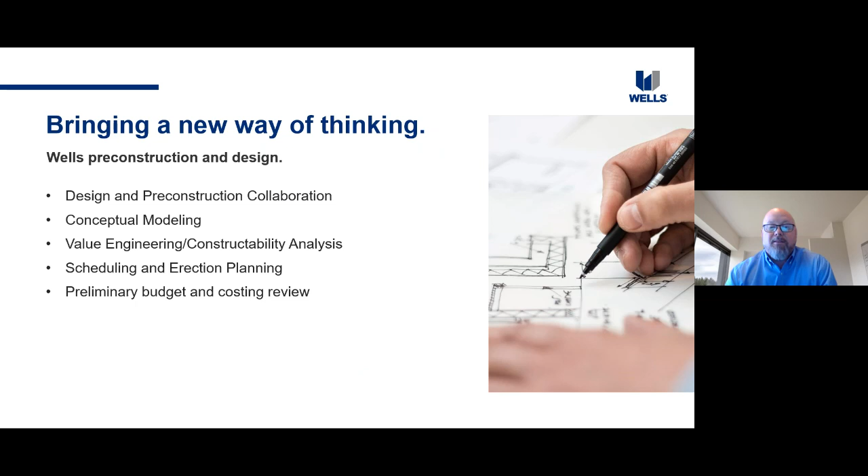Precast concrete is no longer just a standard gray warehouse panel. Combination finishes and new techniques in finishing have become the norm. By using custom forms, form liners, mixes, different finishes, and staining, we're now able to create or emulate almost any building material on the market. To see a full line of Wells' unique finish options, feel free to dig into our architectural inspiration guide on our website.

Something that many of our partners do not know is that Wells has over 60 employees dedicated to the sealants and restoration division. This team covers our entire geographic region. They support not only new construction, but also do extensive maintenance and restoration work in the precast and other parts of the building systems as well.

Now we're going to get to the focus of today's presentation. We are going to attempt to answer the question of how precast as a building solution, with its inherent characteristics, lends itself so well to projects in the civic and community market sector.

As you are aware, the civic and community market sector is far-reaching. We touch everything from community centers to water treatment facilities, and many of these projects serve more than one end user type, sometimes within the same facility. As such, many of these projects require very specific needs assessments completed prior to developing programming for the proposed space.

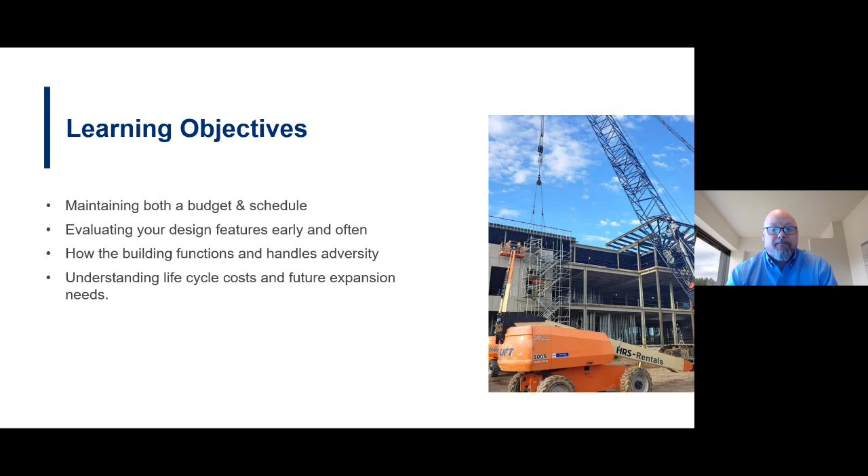By the end of this presentation, we hope you have a better understanding of how using precast and early collaboration can help you be more successful for your owner over the lifespan of the building. Now Chase is going to kick us off today as he shares some of the aspects of project cost and schedule impacts.

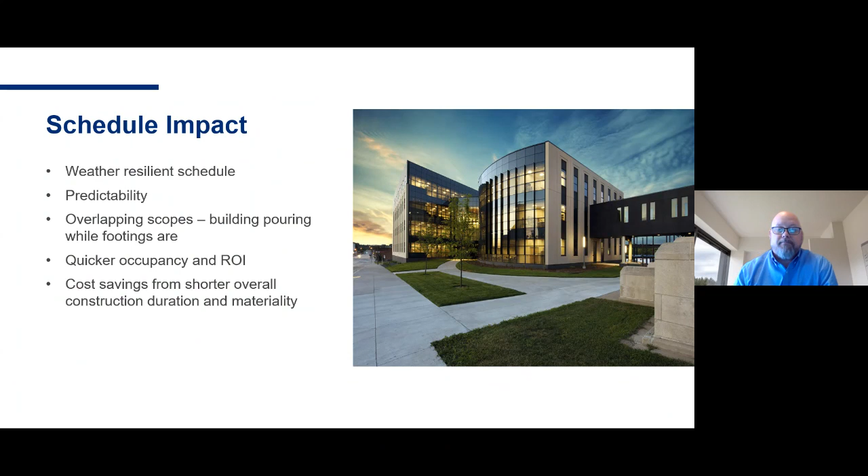Thanks, Kurt. So as Kurt said, pretty much all these projects are budget driven, budget conscious. You're using taxpayer dollars and trying to get the best bang for your buck. So where can precast still play a role in that? A big one that often gets overlooked cost-wise that can contribute to that is the schedule.

Obviously precast is going to be very schedule advantageous from how it's a prefabricated system with a weather resilient schedule. Other building materials getting installed on site, especially in a lot of the markets we work in with winter, as long as it is, can cause delays. Precast is being made off-site in the plant, stored in our storage yards, while the footings and earthwork are going on site, so that once the site is ready, it's being shipped and we're just placing everything, welding it all together. So weather does not hinder us a whole lot in the install of the building itself. That lends to a lot of predictability for scheduling and those end dates.

Often the buildings, if you're thinking community centers or schools or anything like that, are going to have a hard open date that needs to be hit for those end users to get into and occupy the space. The other one is quicker ROI, return on investment. Again, with those bonds and taxpayer dollars, the sooner they can be put to work for those taxpayers, you're going to have a happier community and happier stakeholders.

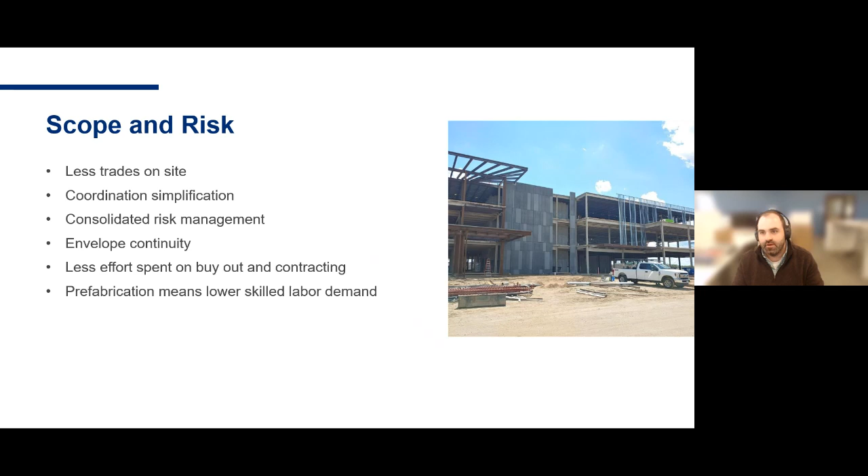And then a big one we're seeing drive a lot of our markets, depending on the exact materiality selected for the design of the building, is that prefabrication in general means less skilled labor demand. Especially, as we'll see in some of the project examples later, if we're trying to emulate a brick or stone cornice work, we can be much more competitive on the precast side versus traditional hand laid masonry, just because that skill is in short supply and high demand. So that cost seems to be creeping up.

Another one that's often overlooked on the construction side for precast is how insurance assesses the risk of the type of material you're building with. I think we've all seen the issues in wood construction specifically, how vulnerable those buildings are during construction for fires, and how difficult it can be to contain an issue once it starts. But there's also a lot of other layers to this, from some insurance folks, of how they assess the type of construction.

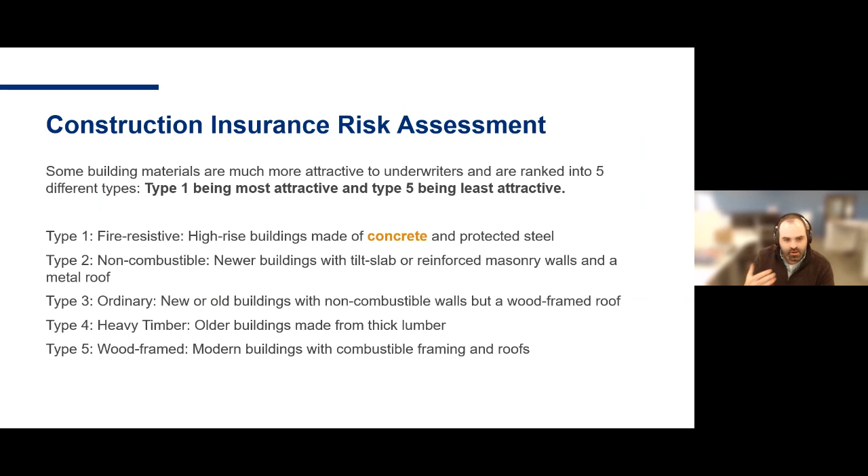You can see here you have type 1 through 5, type 1 being the most attractive and type 5 being the least attractive. Precast, or concrete in general, falls into that type 1, where concrete is naturally fire resistant. It doesn't take any other special treatment applied to it. So even during construction, whereas steel is going up, it's vulnerable for a time until it gets its fireproofing on to get that rating.

So round numbers there, you're just south of 1% of total project cost in the construction insurance right there by the type of building material you use.

Other costs, getting into the hard costs now. Initial construction, obviously we recognize that precast is a premium material, so often if you're going square foot to square foot, it's going to be a premium cost. But like all those items we just mentioned have to be taken into account to really give precast a fair shake of what is it really impacting your project overall.

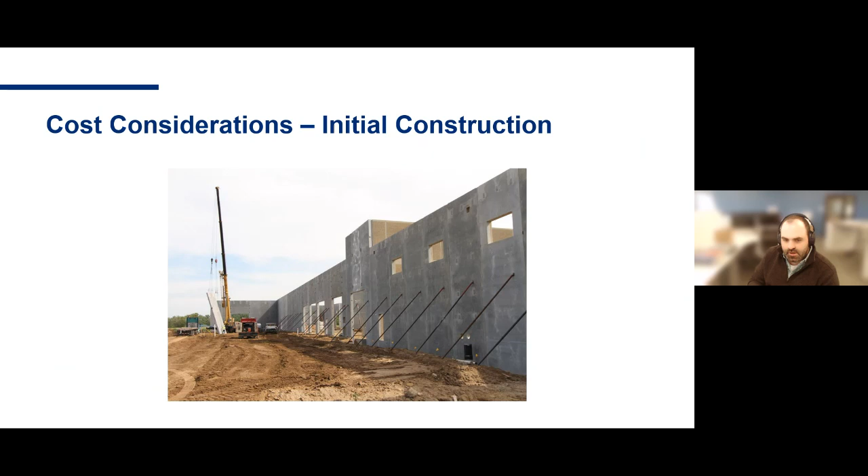The predictability from the schedule, the means and methods of how you have to protect that building overall. That's the beauty about precast is we can come in, set this up like you see in the picture, brace it. That's going to be an engineer bracing plan that's usually going to be covered under the precaster's scope of whoever they're having install it. And you don't have to do any kind of tarping or heating, though you might have some heating to do for the grout underneath of the panels during winter conditions. But all in all, it's a pretty simple, straightforward and speedy construction that can help outweigh that initial cost.

Where precast really makes a difference that isn't often considered in civic and community buildings, at least beyond the initial construction cost, is the maintenance and life cycle of the buildings. Often you're seeing a 50-year life cycle. Precast has been around for 75 plus years at this point. We're seeing a lot of the original buildings still up, still standing, still going strong, with really only minimal annual or semi-annual maintenance or inspections, if not a 10-year maintenance cycle on the caulking or whatever is recommended by the supplier. So the initial construction might be a little bit higher, but the life cycle tails off based on how long you can use the building, and the minimal maintenance you have to put into keeping it a decent, usable building.

Another big one here, especially as we look into sustainability and how we can build resiliently so that we don't have to rebuild buildings as natural disaster events occur, or want to change the use in them, is the resiliency of precast. Something we really pride ourselves on as an industry. It's a very robust material inherently.

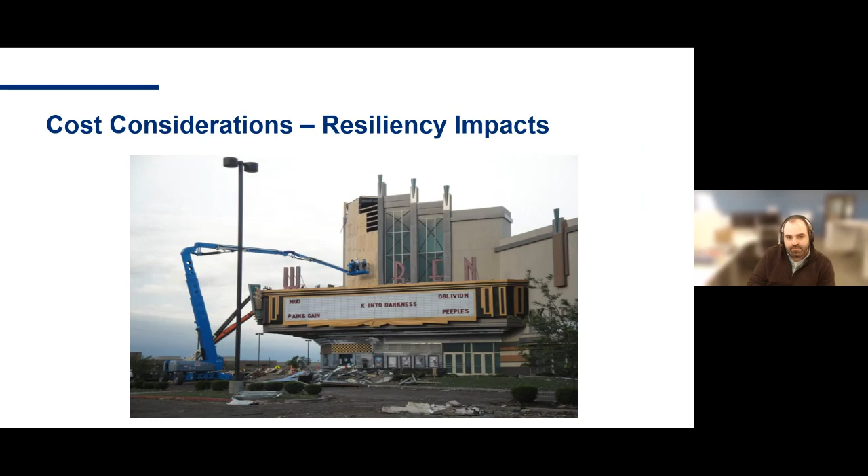With that, I'm going to hand it back over to Kurt. He'll go over some design features and resources.

What we'll talk about now is the incredibly versatile design features that precast has, and the availability of design assist resources, which are key attributes that can help with these types of projects.

When we're evaluating a civic and community project, we can work backwards from an overall project budget to understand what different aesthetic options we can explore based on what kind of monies are available for the skin. If we're looking at the space in regards to it being a storm shelter, we can also start to look at the impacts to the roof structure, the type of material we use both on the roof and the walls, and the overall size and cost of the exterior walls.

Now, with anything, there are cost and production limitations, so it's always best to involve your local precaster for any region-specific aspects to these architectural options, and they can direct you to a solution that will allow you to stay within your budget constraints.

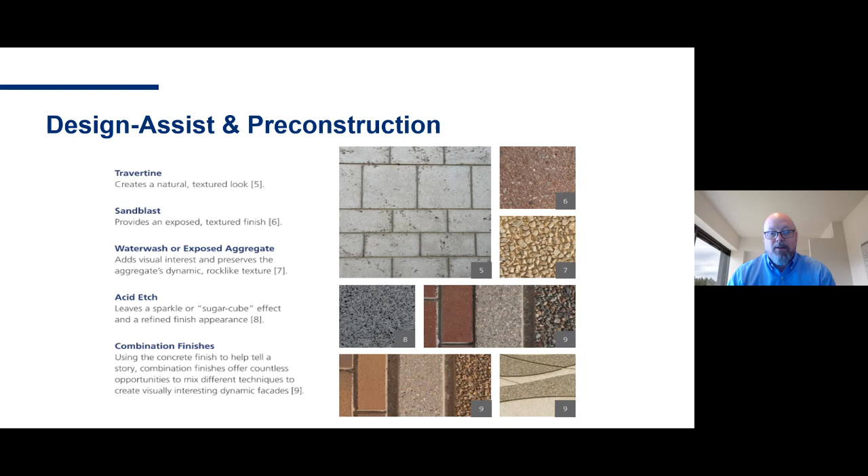We'll start off talking a little bit about form liner, from simple ribbed patterns to intricate designs like mascots and logos. Form liner suppliers can work directly with the design team to come up with the desired look.

Some of these logo type images can be done internally as well with our CNC machines. You can create these logos out of wood or plastic and cast them into the panel.

We can do multiple patterns within the same panel. You can have 2 or 3 different types of form liner finishes. You can integrate the form liner also with thin brick or other finishes.

There are some limitations in regards to the form liner material's overall sizes. Generally, they're 4 foot wide by 12 to 15 foot long. So if you need to go with a full 30-foot panel where you're looking to have a continuous liner on it, you have to look at the idea of introducing horizontal reveals to be able to break the liner, because most of these patterns, the material can't be seamed together vertically without there being obvious seam lines.

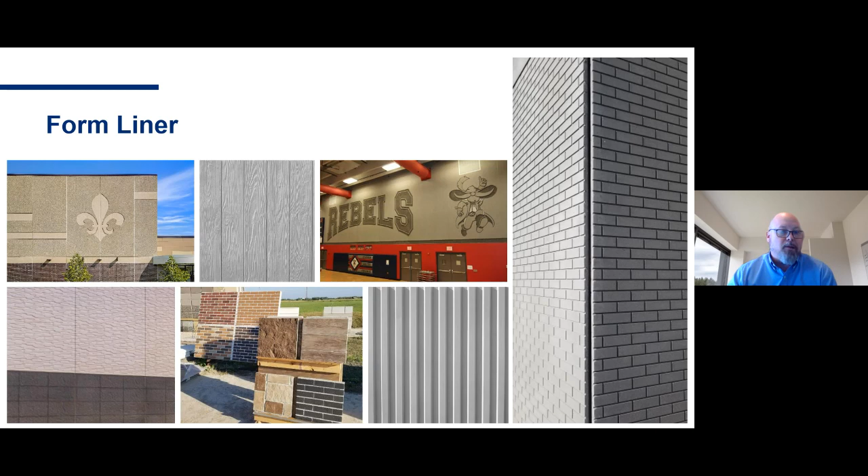That just isn't that attractive in a finished product. So there are aspects of form liner that have some intricate details, where if you involve your local precaster, they can help you understand how liner is to be used appropriately and effectively within precast.

Obviously, cast-in thin brick is becoming a very popular option. In the last 15 to 20 years, you've seen it go from masonry being very common, but with the shortage of labor and skilled tradesmen, you're seeing the idea of using thin brick and precast becoming more and more prominent because of the prefabrication component to it.

We don't need laborers on the field. And as importantly, these panels show up full of thin brick and they can be set in 10 to 12 panels a day. So you can have a building go up in a week or 2 versus if you had standard masonry, it'd be taking 2 to 3 months.

Thin brick is something that we get shipped to us directly from the manufacturer. We have liners that we place in the bed. We're able to provide soldier courses, corner bricks, edge caps, basically everything you would see so that a finished building would have a similar look and feel to a standard laid masonry would.

I would tell you to look for a brick that conforms to PCI tolerances. There are other tolerance thin brick manufacturers out there, TBX and TBS are the other 2. But in regards to using it within precast, we almost always prefer to look at PCI tolerance brick because it has tolerances of +0 in both directions and -1/16. It allows us to fit that thin brick properly into the liner and minimize the amount of bleed through that happens from the concrete onto the face of the brick as we're pouring and producing the panels.

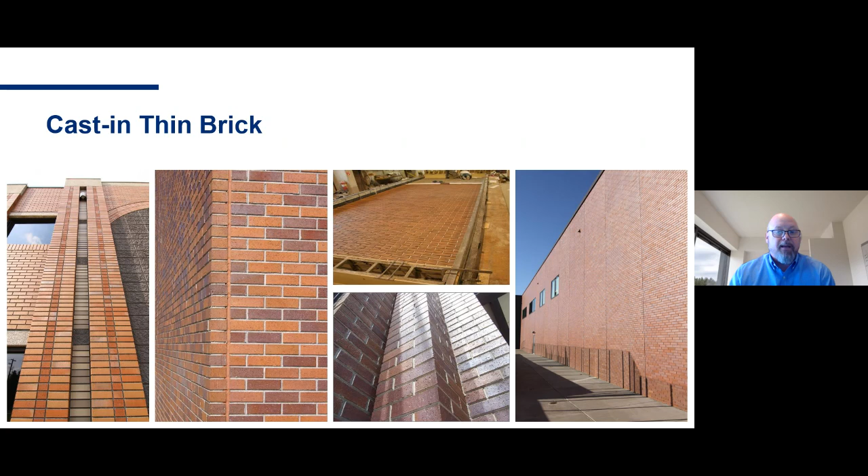Polishing is a fairly new finish option. It's something that's been developed over the last 3 to 5 years. This is a post-production finish. It's very common to be done on signage. It is a time-consuming and costly finish option.

So we generally look at the idea of using this for an accent area or sign panels versus putting it across the entire panel that's 10 foot wide, 12 foot wide by 30 foot tall. It's very labor intensive. It's a slow process and it adds a lot of cost to the panel.

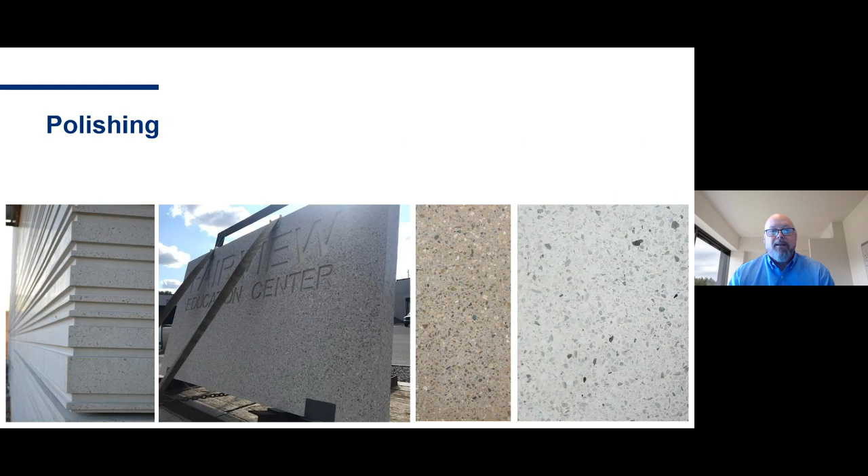So again, if budget is critical, which it is in most of these civic and community projects, the idea of looking at this polished finish to be an accent area or on signage panels or other high visibility aspects of your building is a good way to use this finish without blowing your budget up.

Exposed finish is probably the most common one you're seeing out there. There's sandblast, which you see everything from a very light sandblast all the way to a very, very heavy one. Acid etching is also very common. It's a finish that mimics the look of cast stone. It creates a very, very clean, smooth finish. A lot of times you're exposing only your sands and your other fine aggregates.

Water wash is also one that we use, and it is where we use a chemical retarder painted on the bed prior to pouring, and that chemical will actually keep the surface of the concrete from curing. Sometimes it's about an 1/8 inch or 3/16 of an inch of that outer layer of concrete that will not cure. So the next day when the panel's pulled out of the bed, they can simply hit it with a pressure washer, and it will expose the coarse and fine aggregate that has cured into the concrete. It gives it a very rough look, but it also does a great job of exposing your aggregate. So if you're going to spend money on some granite or some other really nice river aggregates where you really want to expose those beautiful aggregates, that water wash finish is really the direction to go.

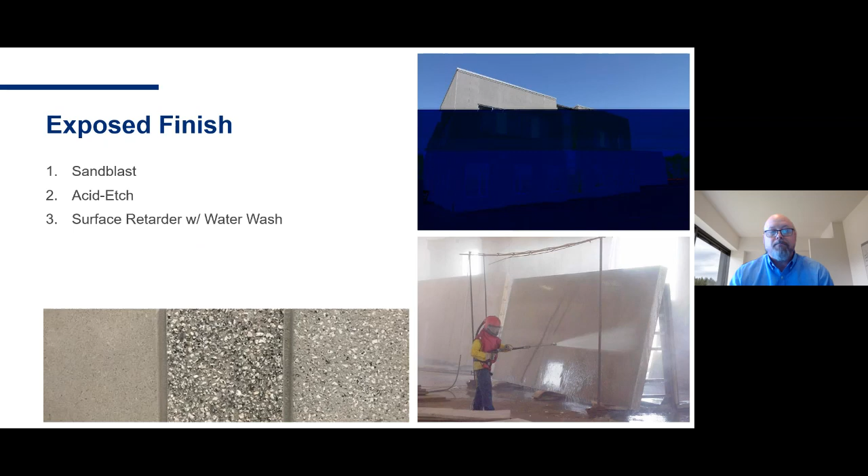Again, you can do combinations of these even within the same panel. As you see in that 3-sided mock-up at the bottom, we can do 3 finishes all in the same panel. Micro etch printing is something that has also started to gain some traction.

You've probably heard of it referred to as graphic concrete or Artico Neo, which are basically the brand names of 2 different manufacturers of these papers. It's a really neat process in which these manufacturers will actually print, almost like a dot matrix printer would, that same type of chemical retarder that we use, but they'll print it onto paper, and the sky's the limit as far as what you can do from an image standpoint.

Again, work with your local precaster to decide if there's an area of your building, whether it's the signage, the main entrance, or maybe the entire building as a whole, where you can evaluate these options. As you can imagine, there is a cost associated with this paper, and depending on the complexity of the print and the size or area of the panels you want to use this type of micro etching on, it can have a significant impact on the cost of your project.

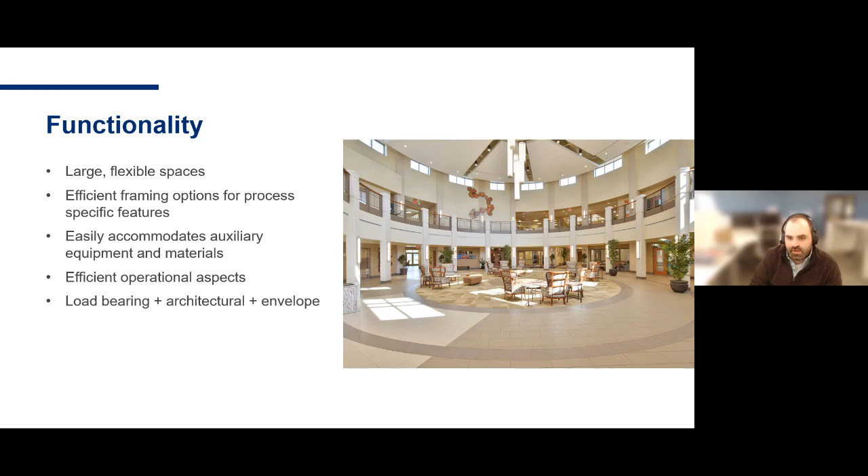Pretty easily, pretty commonly. So specifically, Minneapolis Bus Garage here - this is another project that's a bit of a case study, a great example of how that precast, designing with it, really lended itself to a functional building that was otherwise going to have some issues.

So this building is in Minneapolis, Minnesota. I believe it's named now as the Heywood Bus Garage, but it's for the Transit Authority up there. Their new electric bus fleet needed a new building for almost, I think, 300 plus buses or so.

But just the site that they had for it didn't lend itself to the buses being able to come in on, call it kind of grade level for where the site was. So they were looking at either having to fill up massively for the buses to come off the adjacent streets and be able to get into the site, or what they ended up doing was doing a multi-level structure and doing employee parking and everything on the slab on grade, since it was easier for the cars to kind of spiral down and get there, and then having the buses actually drive up onto the mezzanine.

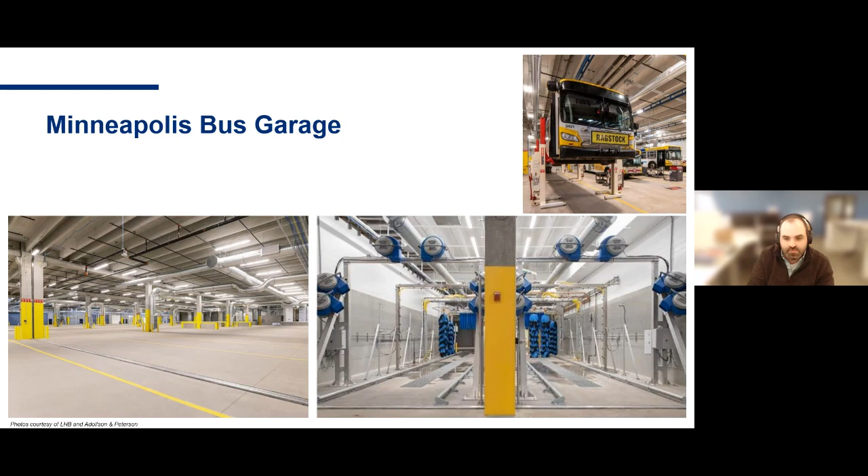So then I'll hand it back over to Kurt to cover some other items in resilience.

Yeah, sure. Okay, so let's talk a little bit about resilience. Obviously, we know that concrete is a durable surface. It's a maintenance-free finish. You can use the interior exposed walls in almost any gym space, community center, public works. A lot of times they're painted, but for the most part, that's about it.

And with the integral nature of color and finish at the exterior of the walls, it provides that cleanable and essentially maintenance-free finish for the skin of your building.

The one consideration you want to think about there is in regards to where your sidewalks are or your drivables, the idea of obviously salt being used in most climates where you've got snow and ice conditions. The finishes that you want to look at for those lower areas where there might be interaction with salts and other winter type additives are something that has less exposure.

So like an acid etch finish or even a polished finish is going to do very well being resistant against those salts and other things that are kind of hand applied in those areas.

When you have a larger, more exposed finish like a water wash or a heavy sandblast, there's a more impactful deterioration that can happen if there's continuous salts used year after year on sidewalks or drive lanes or whatever that abut right next to your precast finishes. So just think about what finishes you have interacting with your other concrete surfaces where you might be using salts and other things like that.

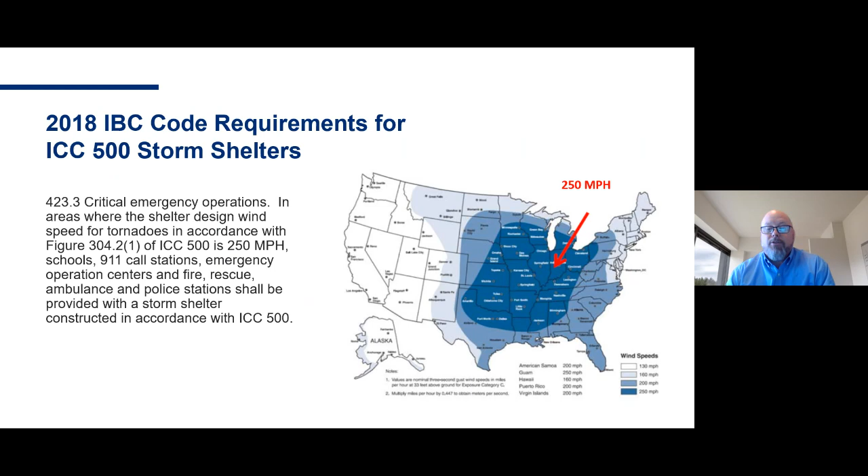Precast, and specifically pre-stressed concrete components, have inherent advantages as a material in regards to their ability to help resist the incredible forces imparted on a structure during a 250 mile an hour wind event. Concrete is a heavy material, and it's extremely hard. The missile impact requirements from ICC 500 are something that precast concrete and concrete in general can meet with only 3 to 4 inches of overall thickness. The biggest attribute of our products that makes this possible is the pre-stressing aspect.

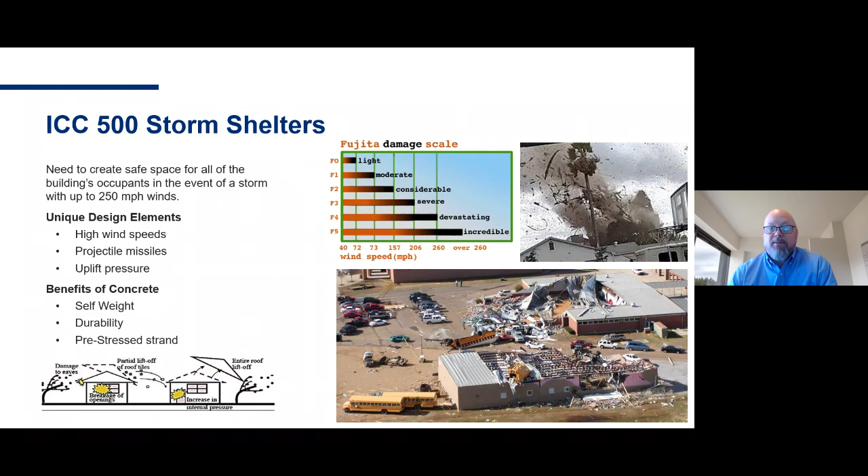We'll discuss here in just a second how the pre-stressing component is so impactful, both in walls and double T's.

When we talk about precast walls in regards to ICC 500 design, there's usually one major impact that needs to be accounted for, and that's your wind pressures. There's both suction and pressure on that wall, and for the most part a pretty standard wall is usually in that 12-inch thick area. To go to an ICC 500 design, we've generally only had to increase the wall thickness by about 2 inches, generally always in that structural width. That interior width generally grows from 6 to 8 inches, just to handle the increased wind pressures applied on that wall, as well as the roof material usually switching to something like a double T, or at least a much heavier roof section.

That's going to require that interior width to handle a little bit more load transferred from the roof to the wall, as well as a little more self-weight to the wall. That self-weight is beneficial, as the primary load you have to account for is uplift.

The other thing that's been unique about precast and a change in the ICC 500 code is that the original ICC, I think 2013 code, talked about joints having to be no larger than 3/8 of an inch, and if they were, they had to be protected, whether interior or exterior, by another material. That 3/8 inch panel joint is just not something that works well in the precast world. You're seeing, for the most part, precast joints being designed around either 5/8 of an inch or 3/4 of an inch joint.

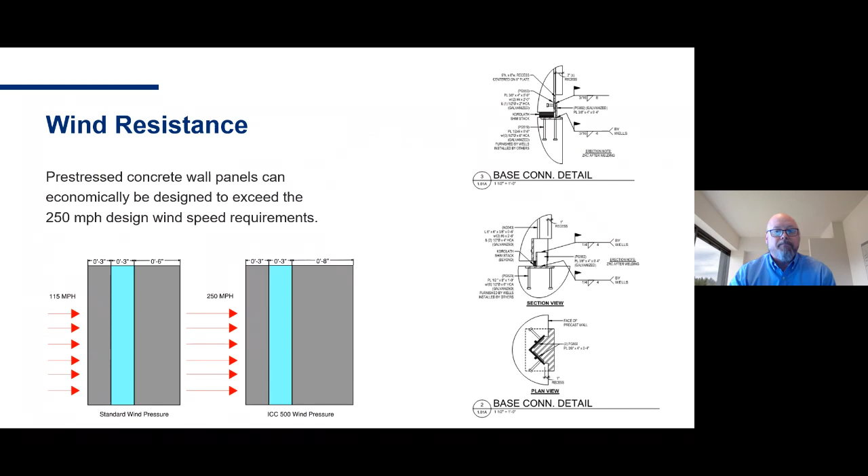As I said earlier, when we're talking about these shelters, what always controls design is uplift. If you think about a large box, whether it's a gymnasium, performing arts center, or community center, it's the roof that undergoes the greatest force controlling design. These buildings sometimes end up with uplift in the range of 250 to 280 pounds per square foot, or even more, and depending on the volume of the space and the length of the span, that helps dictate the overall design.

But that uplift being in that 250 plus number is not able to be canceled out just in the self weight. A double T might have a self weight of 80 to 90 pounds a square foot, and if you put 4 to 6 inches of topping on it, you might get to either 150 or 175, somewhere in that range of just dead weight of your roof material. Well, you're still 100 to 120 pounds per square foot away from meeting the design load you're trying to resist.

And that's where the idea of pre-stressing is so critical, because with these double T's or hollow core members, we actually have the ability to put some of that pre-stressing strand that's almost always in the bottom of a T-stem to create the upward camber, while we transition or add some additional strand at the top of the double T stem, basically right below the flange. And what that does is it allows for some internal stressing resistance.

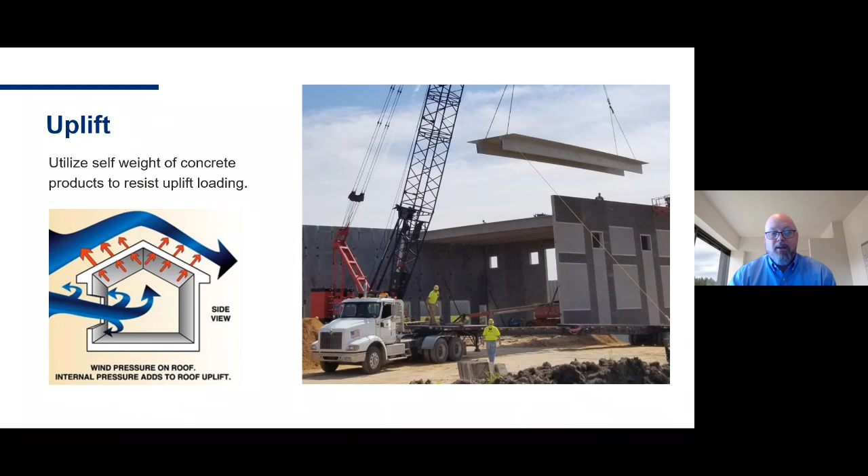And like Chase alluded to earlier, there was that one picture. Thankfully and luckily, every ICC 500 shelter that has been built since 2008 has not been hit directly by an F5 yet. There are a lot of them standing now, and they're all designed, but so far we haven't had anything take a direct impact. Nationwide, there hasn't been a single F5 tornado that has had any impact with an ICC 500 shelter that's been built.

Thanks, Kurt. So touch on maintenance and expansion a little bit, mainly maintenance on the cost side. So just want to get into a few of the specific items that contribute to that low maintenance cost.

So the big one for us is going to be, another code update that's becoming much more stringent, is continuous insulation. Whatever system you're using, the code wants continuous insulation to create that nice tight building and reduce energy consumption. While precast has naturally been for insulated panels, we want continuous insulation. We don't like solid zones that cause condensation or other issues with our panels. So we're going to do edge to edge insulation. We might have wood nailers in for window or roofing attachments or door attachments.

Our envelope is going to be pretty tight, and we can do some special stuff too. We don't typically see it on the civic and community side, but if there's any kind of coolers or freezers, there's other vapor barrier special detailing we can integrate into our panels to further increase that. And generally the comfort of precast concrete buildings, with that insulation and the thermal mass of the structure, you don't get the high peak demands on your energy systems for cooling or heating that you might with other more porous or poorly insulated envelope systems.

Depending on what's going on inside or outside the building, it's pretty easy to wash down the surface. If you leave the interior concrete surface exposed, without drywall, which we see pretty commonly in these spaces, it's nice and durable - if it gets mud or paint on it, just get out the pressure washer hose and spray it down. Same with the outside, if you're getting dust sticking, or salt from sidewalks, you can pressure wash it down.

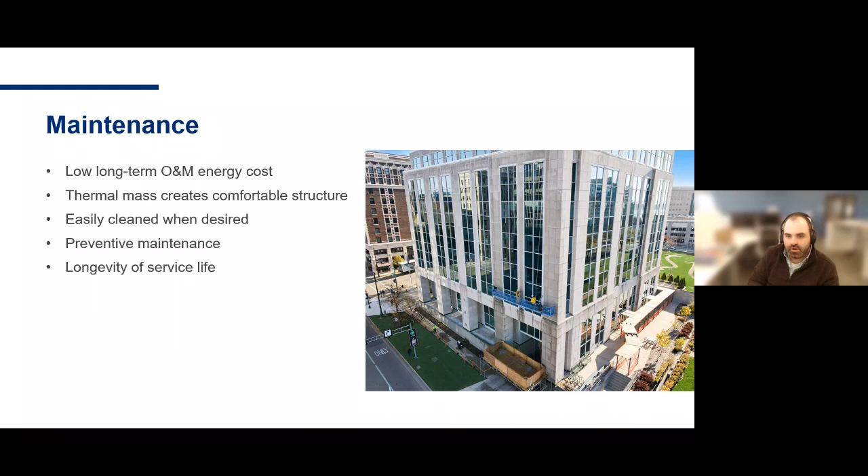Even with that, as we get into expansion, if there's a change in use, it can usually be accommodated pretty easily. So if you're going to swap out an RTU on the roof, or come back in and cut some more man doors or windows, get a hold of that precaster if you can - the original precaster, or if not, then a precaster - and they can help guide you in what openings would be acceptable for that building.

Another big part of precast that's pretty slick is if there's a building planned for expansion, we can integrate that into the original design. And then when it comes time to put that building expansion on, you literally grab the original concrete precast pieces, cut them loose, go put them on the new spot on the addition, and then basically just fill in the gaps of whatever the footprint is.

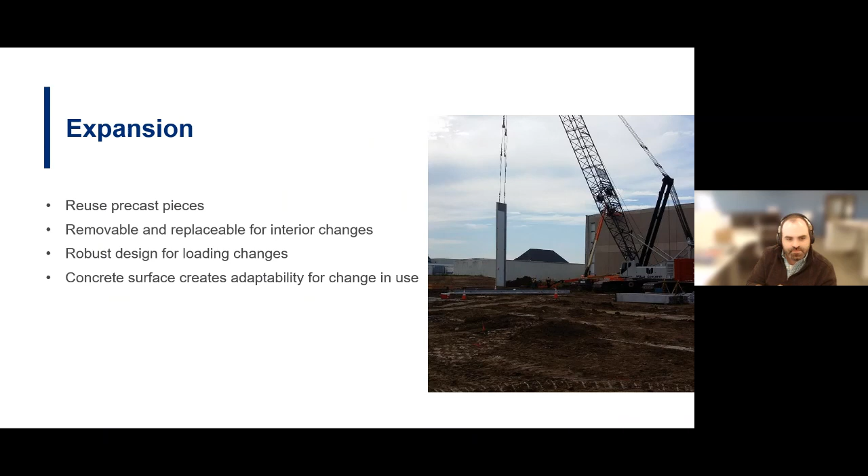Okay, I'm going to take over now, and as we wrap up today's presentation, I just want to reiterate to you as members of the AEC community what you can do to help make your project as successful and creative as possible when working in the civic and community market sector. As we know, money drives these projects almost every time, so utilizing the expertise of your local precasters and design assist team members will be critical in moving the project toward the end goal of creating a building that meets and most likely exceeds your owner's expectations.

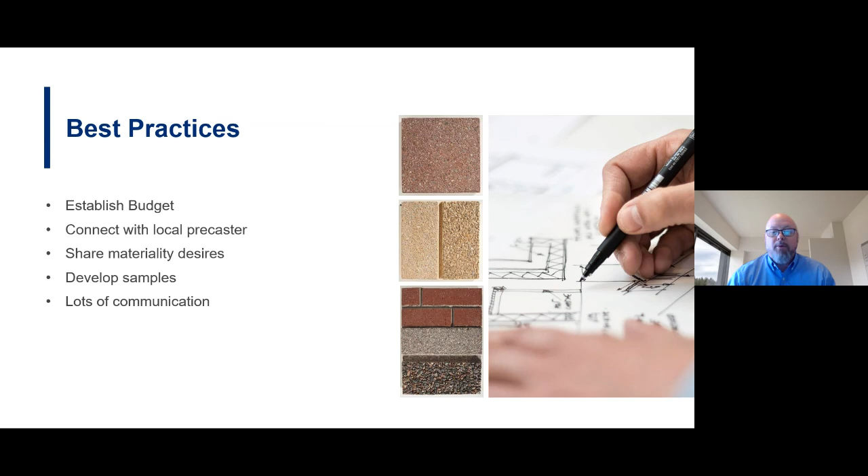The simple answer to when is the right time to involve your local precaster is simply the sooner the better. Precast is the right choice for keeping your projects cost-effective, beautiful, thermally superior, all while being built in an efficient and timely manner, with a finished product that the owner will be able to enjoy for many years to come with minimal operating cost. That concludes our presentation for today.